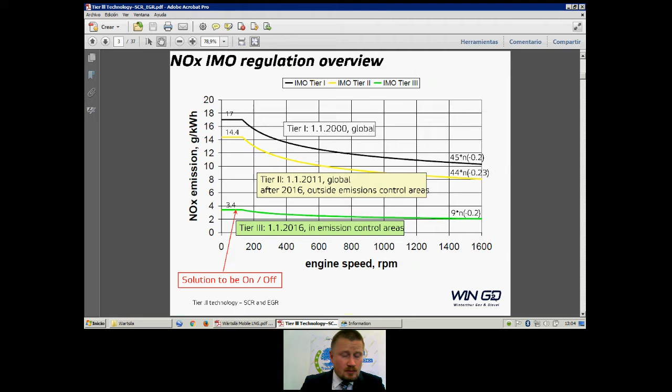So Tier 1, Tier 2, or Tier 3, it's based on a formula, and Tier 3 is a much lower, or much more stringent, requirement on the engine manufacturers. And you can see there is a drop from 14.4 to 3.4. So that's quite a drop.

If you look at SOx emissions, or sulfur oxides emissions, in European ports this is already implemented since roughly 2010. There is already a requirement worldwide. Then, sorry, that is coming 2020. It's 0.1% already in sulfur ECAs. Worldwide it is 3.5, and in 2020 that will become 0.5.

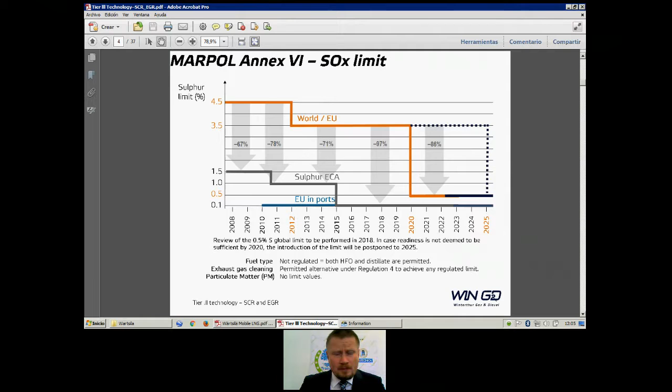What that means is that the US Coast Guard has implemented this emission control area completely for sulfur and for NOx. So any ship calling a US port on the East or West Coast has to comply with Tier 3 requirements. Now, this affects ships coming into service, not the existing ones. This entered into force sometime in 2013 in the United States.

When you look at the options available for complying with these requirements, there are not many. For NOx purposes, you either use an SCR or EGR, or you burn gas.

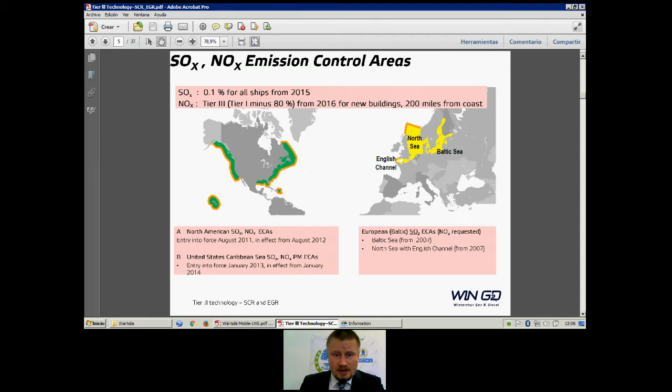Yeah, this is basically the slide. So if you look at ships to be compliant with both sulfur and NOx, let's say nitrogen oxides emissions. Let's say first option, if you do no change, then that's not necessarily an option because you will be quickly out of business. The regulations will not allow you to operate anymore, so you will be out.

Simple as that. You go to fuel switch, and fuel switch means that from your traditional heavy fuel oil, which is a residual fuel, which is a dirty fuel, which typically has high sulfur content, well, it all depends on the price you want to pay for the fuel. So typically fuels had high sulfur content. Now, fuel switch means that you switch to a fuel with less sulfur content. This means you will be compliant with sulfur emissions. That is, by definition, low sulfur fuels, low sulfur content, therefore compliant with sulfur emissions.

But then you need to be compliant with NOx emissions. I'm talking about either the future for, let's say, North Sea, Baltic Sea, when NOx is supposed to come into force sometime 2016, or if we look at the east and west coast of US, where you already have to be compliant.

Now, low pressure SCR or SCR and EGR, let me use only these two. That is selective catalytic reducer, that is SCR, and EGR is exhaust gas recirculation. These are two technologies that you can employ to clean your exhaust gases of NOx. So you use these two devices.

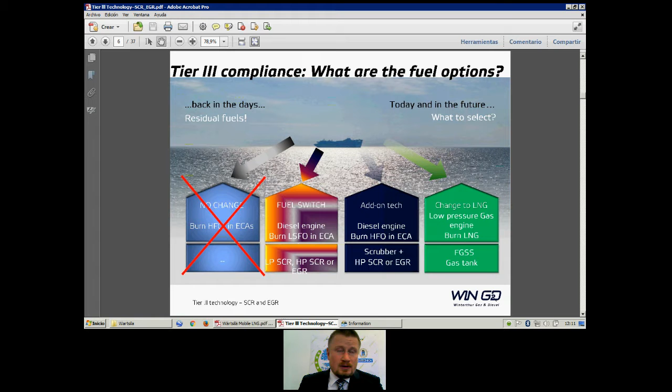Then the other more neat approach, which the two suppliers available, Wärtsilä and MAN D&T, primarily for two-stroke of course, offer is to change to LNG. Now what LNG provides you, I mentioned earlier that for EEDI calculations, methane, or natural gas, has a lower carbon factor in the formula. So by definition the fuel is more favorable. It's more clean. Particulate matter, which I haven't talked about yet, when you burn HFO there is a very high emission of that. When you burn gas, it's a much cleaner exhaust. And gas typically has virtually no sulfur in it. And if you use low pressure dual fuel engines, then you don't need to have an SCR and you will be compliant with tier 3.

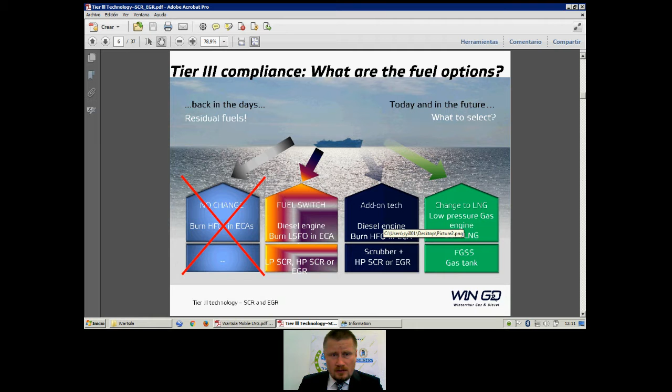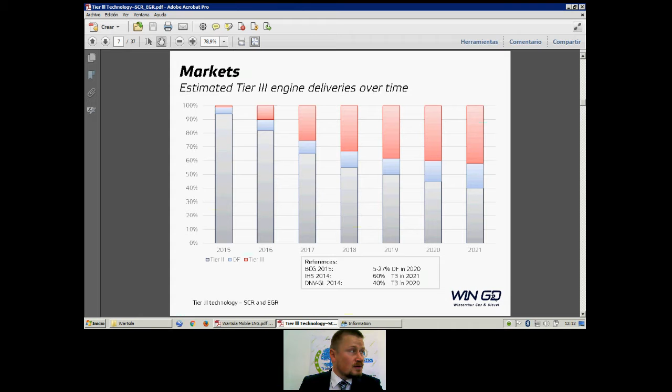I'm going to clarify what is high pressure SCR and what is low pressure SCR, but eventually they are all, say, the catalyst you have in your car for NOx. EGR is pretty much the same. It's exhaust gas recirculation, as the name implies. You get the exhaust gas, you get it washed, then dried, and then back into your cylinder. So this process requires some equipment, some fresh water for cleaning, and some blowers to dry the gas, because you don't want too much water in your cylinder. Then the SCR is a bit different from the EGR.

Now the principle of SCR, or selective catalytic reducer. It's based on urea injection. You have a mixing pipe. Because you have high pressure and high temperature in that mixing pipe coming from the exhaust gas, the urea splits into ammonia. Basically what you need is ammonia to get into your catalyst, which is the brick in simple terms. Then you have an exothermic chemical reaction, releasing heat as well, and during this process you get nitrogen and water.

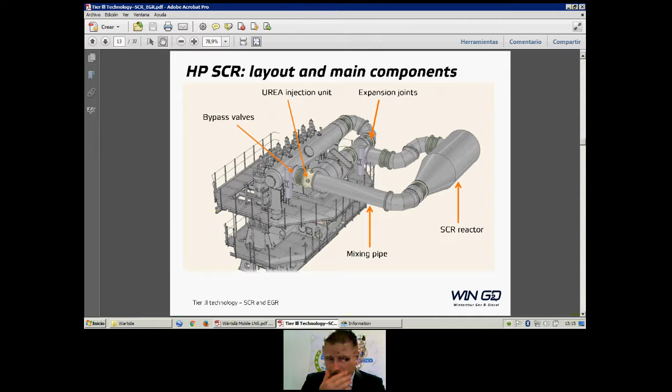I'm not talking about the SCR itself, but the entire system, because you have the mixing pipe, you see here, the elbows because you have very large diameters, the air receiver, all the system here. Very large piece of equipment. Whether low pressure or high pressure, SCRs both work on the same principle. The only difference is the location of the SCR itself.

Now, just a minute. Yes, here we are. Back to the main slide, let's say.

Now, the SCR is temperature dependent equipment. The high pressure SCR has to go before the turbocharger, and the low pressure SCR is typically positioned after the turbocharger. By that I mean the high pressure SCR needs to be installed very close to the engine, and the low pressure SCR can be installed in the funnel. I'm going to draw some parallels here, but they are not as black and white as I'll mention them. We can argue that the high pressure SCR could be more easily implemented on newbuildings, because then you design the ship and have more freedom to position this equipment around the engine.

And the low pressure SCR, we can argue, is more favorable for conversions, where typically you already have an engine room, a vessel in service, so you don't want to destroy what you have paid for, and then you would put it somewhere in the funnel. Not saying that doesn't disturb the exhaust pipes or that you don't have to rearrange, but at least there's much lower cost involved.

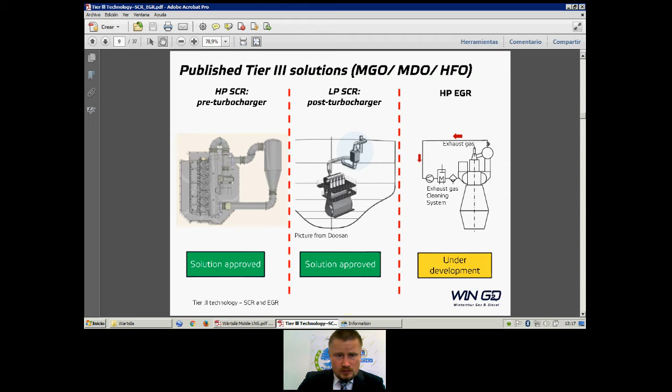EGR is a solution that is attached to the engine itself. All the piping and recirculating is very close to the engine, practically attached to it. Then you have the ancillary systems that have to stay in the vicinity of that engine as well. This is just a very schematic diagram of how the system looks. You have valves, blowers, scavenger, coolers, turbocharger and compressor.

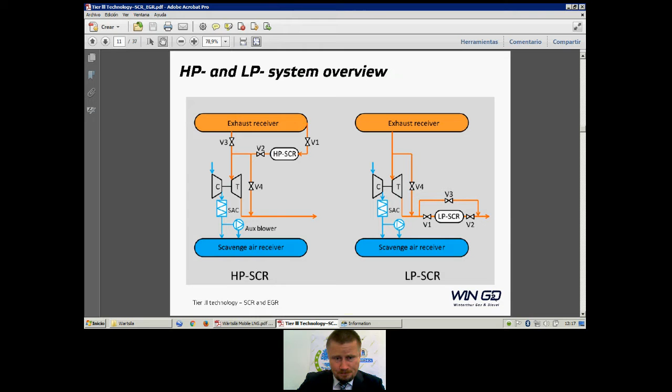Okay, let me go a little bit about this high pressure SCR. I'm going to jump on this slide here. Now, SCR is a very large piece of equipment. It's not cheap, let me use this word. It's quite expensive. And of course, if you are not running 100% in ECA, you don't necessarily want to run your SCR if you're not forced to. And I'm saying that because the more you run your SCR, the more you have to do maintenance on it, and the more it's going to cost you.

Now, I mentioned before that it's similar to cars, but imagine a much larger scale. So you have a number of valves that will bypass the SCR. If you're not in ECA, then from the air receiver, the exhaust air will go directly into the turbocharger. You see the red arrows here and the blue lines here; basically these are the bypasses. You have the gates that are closed.

Now, when your ship enters into ECA, you will need to run your SCR. You will close the blue line here. I don't know exactly if you see my pointer, but in the lower left picture you have the dark blue arrows and the light blue. The light blue is a valve which is closed, so from the air receiver the air doesn't go directly into the turbocharger, but goes into the mixing pipe and then into the SCR. At the end of the SCR, hopefully you get a NOx-free exhaust gas, and that goes into the turbocharger and continues the path into the funnel and out.

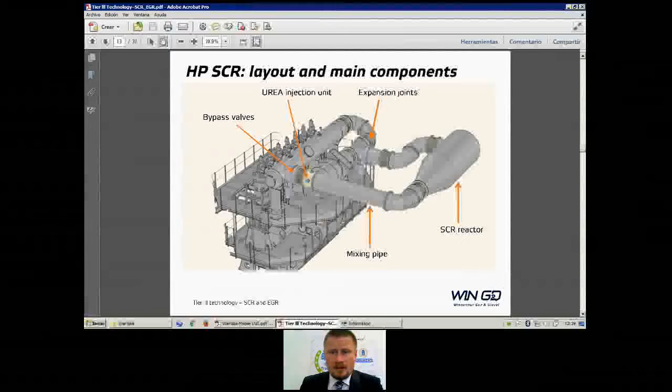Okay, you need to have a tank for urea. You need to have your pump for that, and then you need to have the compressed air to blow the bricks for cleaning.

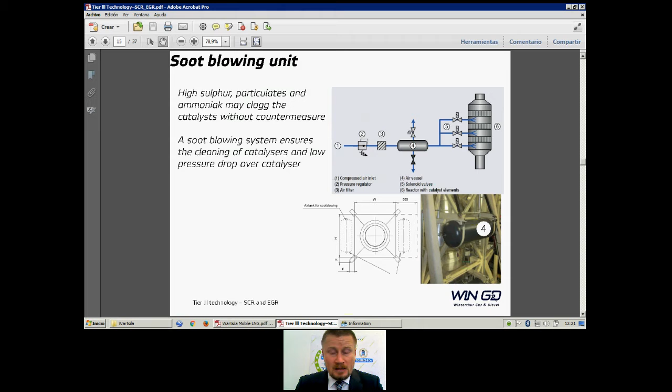All right. Looking at what we, Wärtsilä, Winterthur Gas & Diesel, have done in that respect: for high pressure SCR, we have a number of references running since 1999. Whether you are aware or not, there is a test engine, 6 RT-flex50, which is DF actually, or has been non-DF and then converted to DF. That also has an SCR. A number of other ships are running on high pressure SCRs.

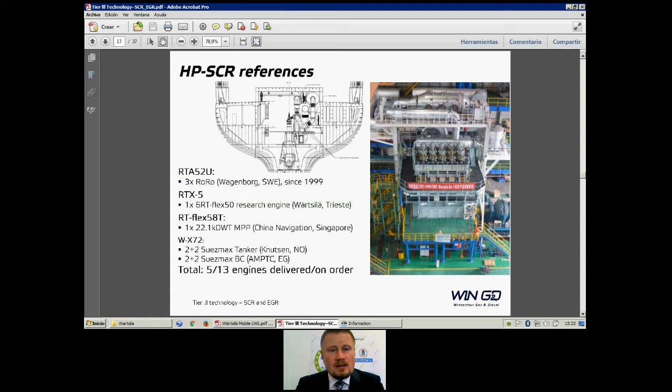To make it simple, high pressure SCR means before the turbocharger, that means close to the engine, or otherwise very close to the engine. Low pressure SCR means, imagine it somewhere in the funnel. So you get more room in your engine room. Right, low pressure SCR, I mentioned a little bit about this. In both cases, low pressure and high pressure SCR, there is no modification required on the engine side.

I feel that I need to tell a few more words about WinGD, Winterthur Gas and Diesel, what we do. We don't manufacture the engines. We actually design the engines, we own the IP, and then we sell these licenses to our licensees in China, Korea, Japan, even Europe, and Vietnam to build the engines. So we don't build the engines ourselves. We develop the concept, the design, the product itself, and then sub-suppliers are manufacturing this on our behalf.

Of course, together with them, we focus on getting the quality and getting the product compliant as required. Now, when it comes to SCR, this is cleaning the NOx from the exhaust. This is something that we need to do because it's a requirement from IMO and it's dependent on the technology itself. As I said, the sulfur is dependent on the fuel, and CO2 is rather dependent on the ship design, ship type, and the willingness of a particular ship owner to run at 40 knots or 18 knots, which makes a big difference. So SCR is more tied to the technology.

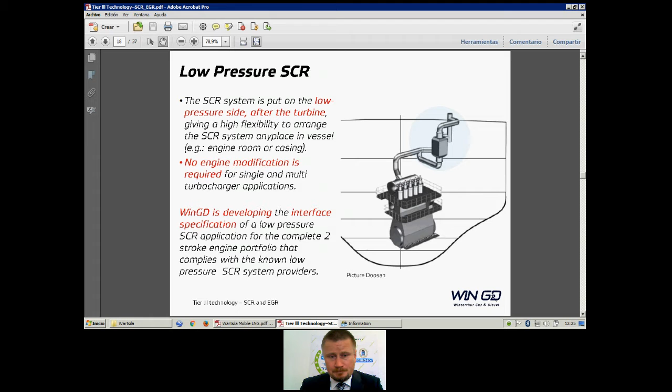Let's look a little bit at the components you will have here. If we start with the low pressure SCR, you have the diagram on the upper right hand. The design of this system is owned by Doosan. Doosan is a manufacturer in South Korea. Typically, you have the reactor, which is the catalyst itself, the big blue piece on the funnel, on the exhaust pipe you see. You have the ammonia generator, a burner, a blower, main valves, and the ammonia injection grid. It works in a similar way like I showed before. I'm not going to explain this further.

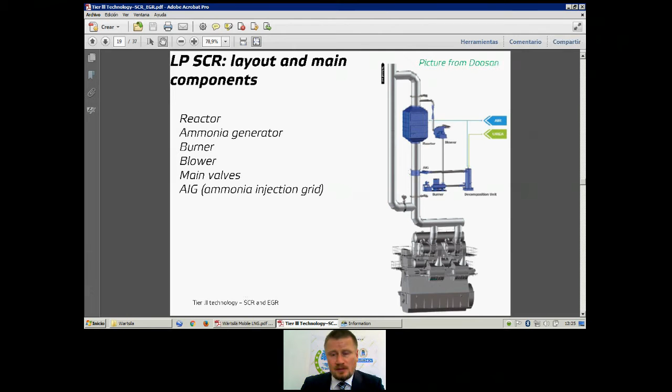Difference between low pressure and high pressure with regard to equipment. The high pressure has the downside that it needs to be near the engine because of the exhaust temperatures, and the low pressure needs some extra components because it's higher up the exhaust chain. Your target temperature is somewhat lower, but you need some extra equipment. If we compare the equipment you need for one or the other system, they're all listed here, but primarily you will have this blower and some extra fuel oil supply for the burner. So basically you will have to tune your two-stroke engine to burn a bit more fuel to get to the right temperature level at the inlet of the low pressure SCR.

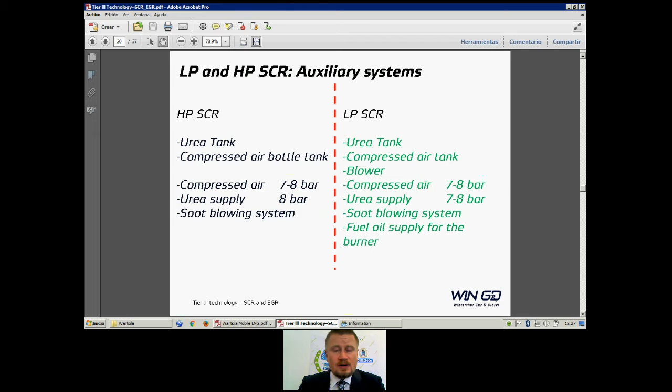This means basically that your high pressure SCR has a lesser impact on the specific fuel consumption of a two-stroke, while the low pressure SCR has a somewhat higher impact on the specific fuel consumption. It starts somewhere from 80% MCR and below in case of low pressure SCR, and in case of high pressure SCR, 40% MCR and lower. So you will see a gap in that region, 1 to 3 grams more consumption for high pressure SCR below 40%, and 1 to 3 grams from 80% and below in case of low pressure SCR.

Size-wise, this is for a 15 megawatt two-stroke diesel engine. The size of such a unit would be something like 4.3 meters, diameter 2.6, and if you look at the other reactor, the low pressure SCR, you have the dimensions listed on the right side. So the low pressure SCR is somewhat smaller than the high pressure SCR. In the end, they both do the same.

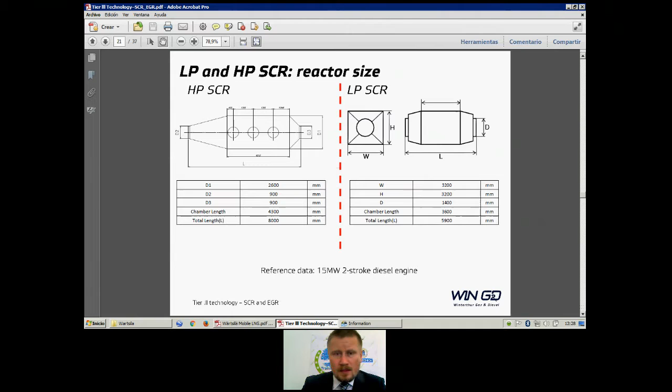I was mentioning about the temperature and the impact of specific fuel consumption, somewhere below 40, 50. The target temperature for high pressure SCR is about 310 degrees Celsius. In that range, you will have a gap because you need to tune your engine to burn a bit more to get to the right temperature. That means compared with an engine that doesn't have an SCR, the engine with high pressure SCR attached will see an increase in specific fuel consumption.

This is basis low sulfur fuel with 0.1% and below. Now, if you look at the low pressure SCR, the temperature variation is a bit different, but the target temperature is also different. Nonetheless, at about 80, 90 or so, you need to tune your engine to burn a bit more, again, to get to the right temperature at the inlet. Otherwise you'll not get the desired effect, and the catalyzer will not actually perform.

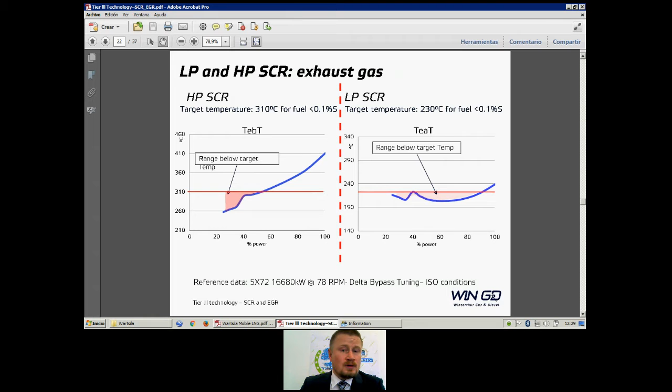Similar way here, the tunings. Basically what I mentioned, that you have this penalty of 1 to 3.

Here you can see a specific fuel consumption curve for a diesel engine, like a tier 2 engine. The green line on the left chart means it's a tier 2 engine, more specifically a 6X52, 8 megawatts, roughly 9 megawatts. When you have the SCR attached, you see a slightly higher specific fuel consumption from about 40 and below. On the low pressure SCR, because of the temperature variation we saw in the previous slide, the green line is the tier 2 solution, and there you see the engine performance in terms of consumption compared to a tier 3 engine with the red line, which has a higher consumption.

This is basically the effect of SCR. Because fuel is a very important cost item in ship operation, typically a ship owner would not like to have an engine that consumes more. On the other hand, he might be constrained by aspects like space in the engine room, like new building or conversion. So you have options at hand, but they all cost money. There is nothing for free, at least not yet. So it is going to be a higher consumption.

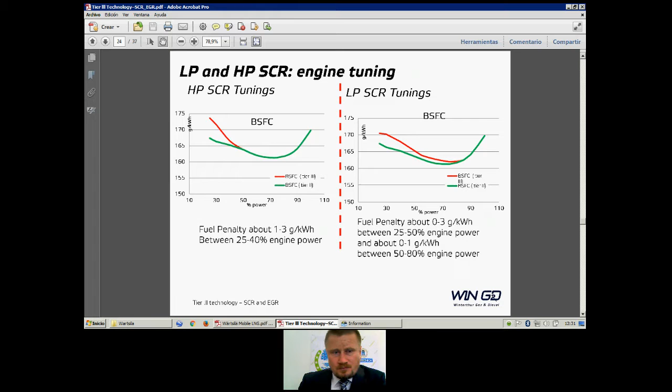This is basically very similar to the one before, just that it's a different tuning for the engine and how that affects the consumption.

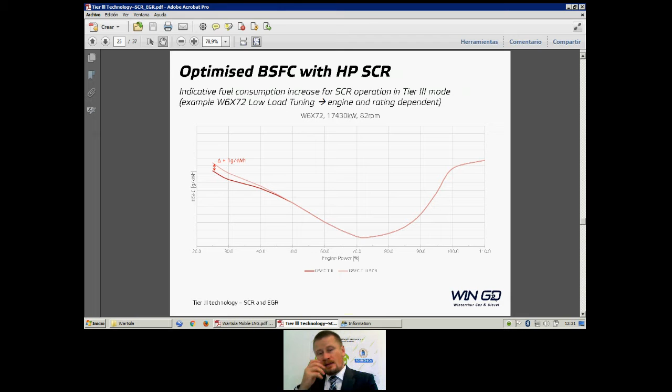The available tunings for the engines include standard tuning, delta bypass, and low load tuning, both for high pressure and low pressure. You see that you have the bypass, delta bypass, and low load, where you can actually have the tier 3 solution, high pressure or low pressure, installed. I think I'm going to talk a little bit about this tuning, what they mean.

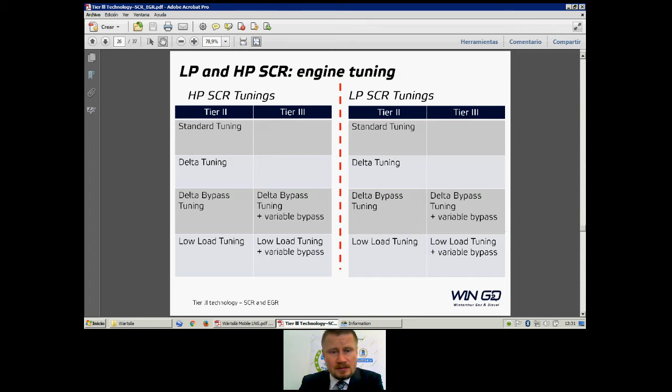The SCR can be applicable also to multiple turbocharger solutions, so it's not only applicable to a single turbocharger solution. All this requires very close communication between the engine designer, like Winterthur Gas and Diesel manufacturer, like our licensees, the SCR component supplier, which can be the licensee itself, the same manufacturer for the engine, or can be a third-party sub-supplier for the SCR solution, and of course the shipyard, because they have to build, install and commission the whole system in the end.

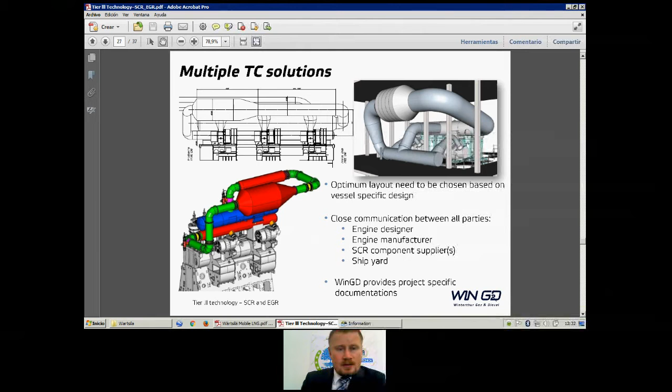Let me talk about EGR now.

Just to make a parallel here, Wärtsilä, or Winterthur Gas and Diesel nowadays, we have been developing in the last year the SCR solution for tier 3, while our competitor, MDT, the main competitor, has developed exhaust gas recirculation. They both serve the same purpose, cleaning the exhaust gases of the NOx oxides. One works better than the other, or otherwise, depending on the application. You have seen in case of high pressure and low pressure EGR, SCR, what that means: one is before the turbocharger, meaning it's more crowded in the engine room afterwards, and the other one is after the turbocharger. Now the EGR system has its advantages.

We will see them in a second. One of the main advantages is that you don't need to have urea. You use just fresh water to clean the exhaust gases. But then you need a water treatment that you give to the exhaust, and then you dry it, and then you bring it back to the cylinder.

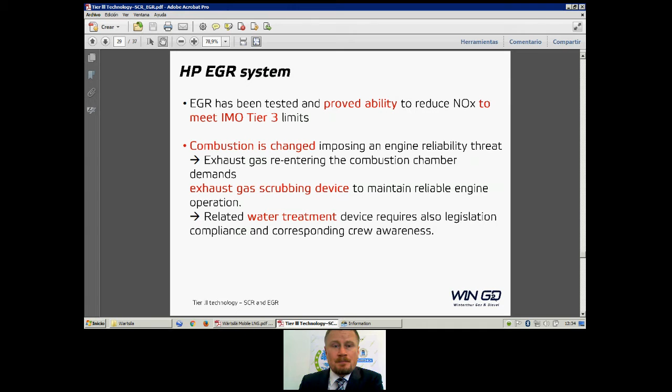Just to compare a little bit the SCR versus EGR installation, the EGR is a solution that needs to be attached to the engine, in a way that you have very short pipe connections, because you have to recirculate all this, and you want to minimize the losses in the system.

On the left hand side, low pressure and high pressure SCR, we put them under the same title because it's the same principle. It differs in location. High pressure EGR on the right side requires a bit more equipment, but on the other hand, it doesn't require urea, which might be an advantage. It depends on the operation profile, the preference of the ship owner, and many other factors.

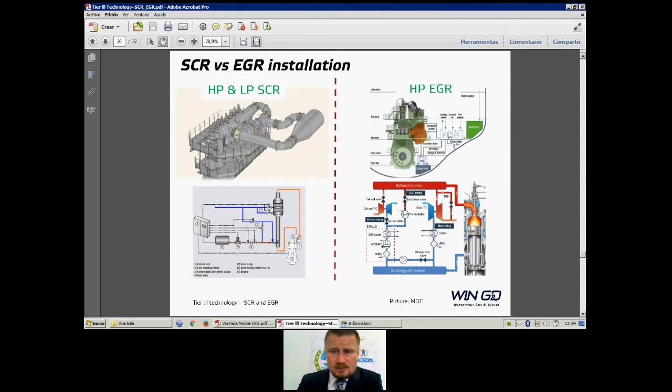This is how it typically looks like for high pressure SCR, or you have a slide between high pressure and low pressure. Comparing high pressure SCR, the reason Winterthur Gas and Diesel favor the high pressure SCR more is because the impact on specific fuel consumption is far less than the low pressure SCR. Of course, there are situations where we have to go to low pressure SCR, either because of the design of the ship or because of the technology itself.

On the left hand side, high pressure SCR, the equipment you need and the requirements for urea supply at 8 bars, compressor at 7-8. Then you have NaOH on the right side, NaOH tank, freshwater, sludge, and some extra power to run those devices in both cases.

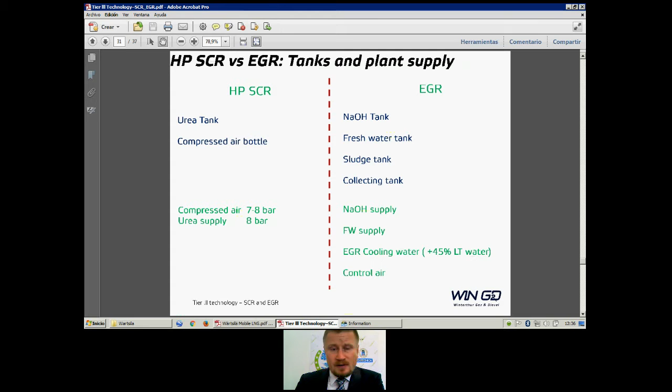Actually, a bit more on the EGR side. Both SCR and EGR are technologies developed by the engine manufacturers. Winterthur Gas and Diesel, like the company I'm coming from, are also developing EGR. This is something that will come in the next 1-2 years. The technology itself is developed because there seems to be a potential market for it, but nonetheless, so far, we believe that SCR is the easier way to go.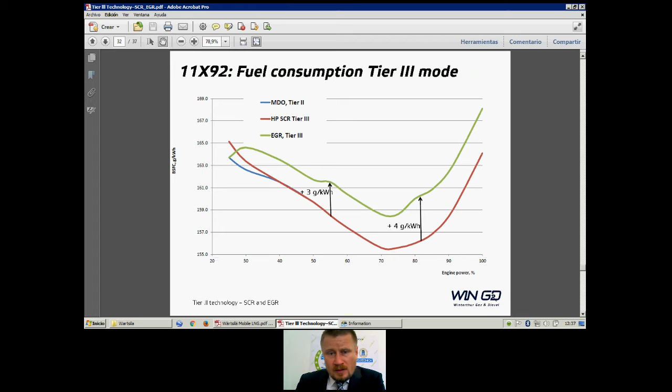So the higher gap is towards the higher engine operating range, up to 4 grams, as it is said here, all internal testing.

From the operational point of view, operational expenditure, we can see here an estimation of costs in percentage from the operational expenditure for high pressure EGR and high pressure SCR. If we say 100% is the total operational expenditure, let's say the orange stripe comprises of sludge, power, blower, the power for water treatment system plus the blower, and fuel penalty, as we have seen in the previous slide.

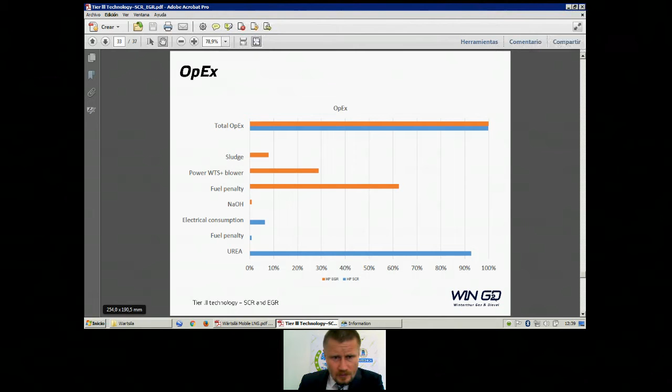Then we have NaOH. Then if you look at the high pressure SCR, yes you have the urea, yes you have a fuel penalty, and we can see it again here. You see the difference between the blue line and the red line, so it's far less. And electrical consumption, of course, because we have some pumps to run the urea. And in the end, well, at least it's not the end, I have a few slides more.

But typically the high pressure SCR is a lower investment than a high pressure EGR. If we combine the two, you would see that the high pressure SCR is somewhat the preferred solution from the cost point of view, including the consumption. As said before, SCR is the first choice for IMO Tier 3 compliant diesel engines. It provides lowest investment costs, it's a proven solution, at least coming from 20 years experience in power plants, and it is applicable to the entire engine portfolio.

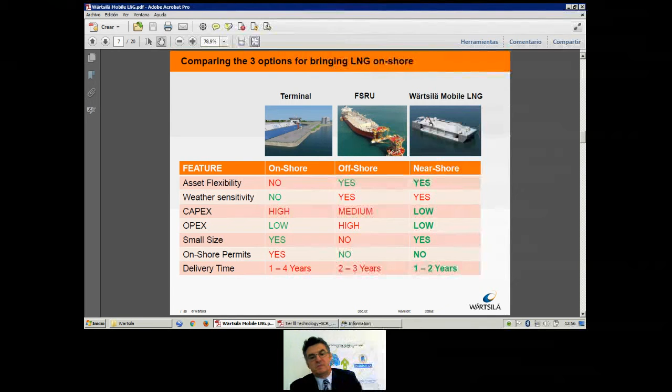And the delivery time. Building a small terminal, the construction itself doesn't take that long, but from the moment you start asking for the permits, etc., it can take between 1 and up to even 4 years to get the installation up and running. FSRU can take between 2 and 3 years, depending on the shipyard, schedules of the shipyard, workload, etc. And the mobile installation you can have almost soon. So it's a matter of making the decision, and in a couple of years maximum, you already have the installation running.

And so this is an image of what we think could be matching future demand of LNG in places where LNG today is not available, and they don't want to refuse to have cheap and clean energy involved. So this kind of installation, and I think we are the first providing this kind of solution to the market, can handle small amounts of LNG efficiently, which is important. Efficient matches with investment costs, and small amounts, which can be what a small island needs.

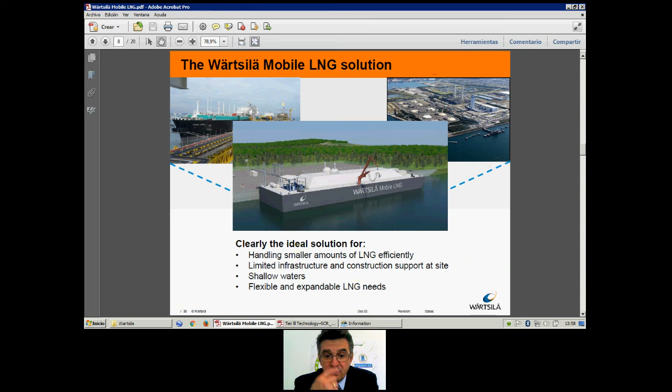The infrastructure you need onshore is not that important at all. You can build it very easily, and you can transport it to places where you don't even need to do a lot of dredging prior to having the installation, which is again costly. So this is flexible and expandable, which means you can make it as big or as large as you want, not taking stupid decisions.

This picture, sorry for it, it's not that clear, it's a PDF. But you can find 2 lines of numbers in the lower half of the slide. The first one you should look at is the megawatt figures. These are typically power plants that can be installed anywhere. You can have power plants going from 50 megawatts up to 800, and of course bigger. And depending on the demand, of course, you can have a small one. We're talking, of course, about power plants running on LNG. They are typically refilled twice a month.

So, the needs of LNG, for instance, for a 50 megawatt power plant with an average efficiency of 46%, and these are the typical values of calorific value and density of typical LNG. If you want to refill it twice a month, you need a tank of 7,500 cubic meters, and so on. So double for 100, etc.

So for the smallest in this chart again, power plant, 50 megawatts, we can provide an LNG barge, the basic one, as we call it, which has almost nothing on board apart from the tanks and the regas unit, which is enough. From as low as 5,000 cubic meters up to more than 10 and up to even 15. And of course, if in the future you need more energy, you can add more barges up to, why not, 30,000 cubic meters.

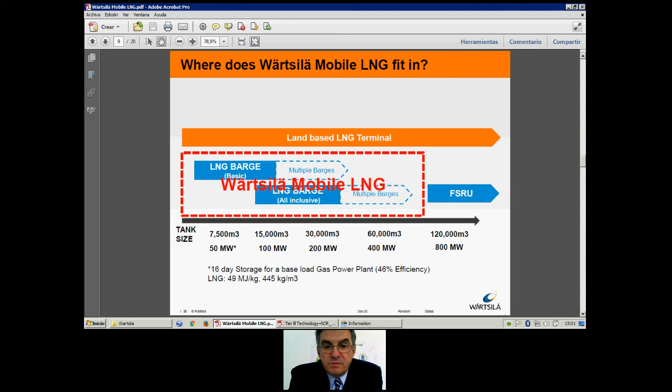So this is it. Just to give you a hint of how it would look like, this would be the smallest LNG storage and regasification barge that can be provided to a community that is demanding it. The storage volume can go from as low as 5,000 cubic meters to 15. This is a bilobular C-type tank. Bilobular, you can see one cylinder there, but they are, let's say, two attached to each other.

It's bilobular. The width of the barge should be no more than 32 meters, which curiously matches the Panama Canal, the existing one. And the length should go, depending on the amount of cubic meters you want to store there, between 80 and 150 meters. The important point, draft, maximum should be 6 meters, which is almost nothing. You can easily find 6 meter draft waters almost everywhere. So that's an important point.

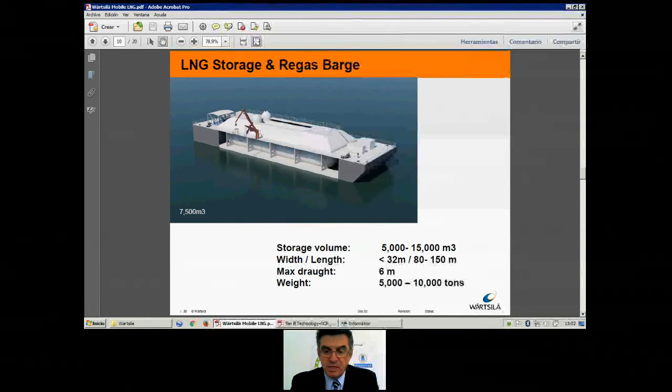And this is what we call the all-inclusive, which will be in places where they want the barge to be self-supporting for everything. So it should also have its own control room and also the power source, a 1 megawatt genset there, for being absolutely self-sufficient. And this one should go between 10,000 up to, why not, almost 40,000 cubic meters.

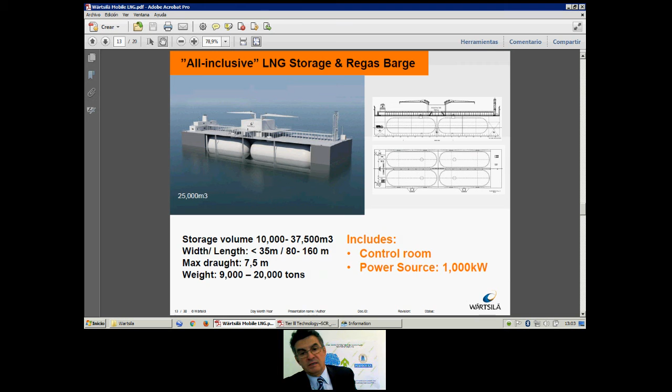And you can see the length is the same, and then the width is going up, and especially the draft is quite big. So that makes it go up to 37.5 thousand cubic meters. And the weight again can go up to 20,000. This is the solution. Again, what makes sense in all this is to have the possibility of having cheap and clean energy in places where today, and this is a fact, they always have to go to dirty heavy fuel oil.

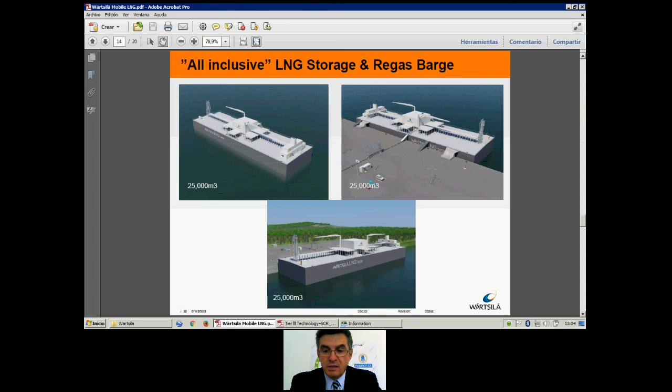And of course, the solution can be even more complex or more complete, so to say, because it can be combined with a floating power barge. In this picture, you can see the complete solution. In a community that needs clean power supply, the decision can be made today, and in less than 2 years, you have the installation up and running where it's needed with a clean and cheap solution.

Yeah, the mobility: you can take them where it's needed, and when it's not there, you can take it to another place where the need is more, or simply the place where the barge is located, the community or the country wants to transform it into a different thing, and then they think that the best location for the new power plant is another place. You can take it and move it so that you can free the space for other issues.

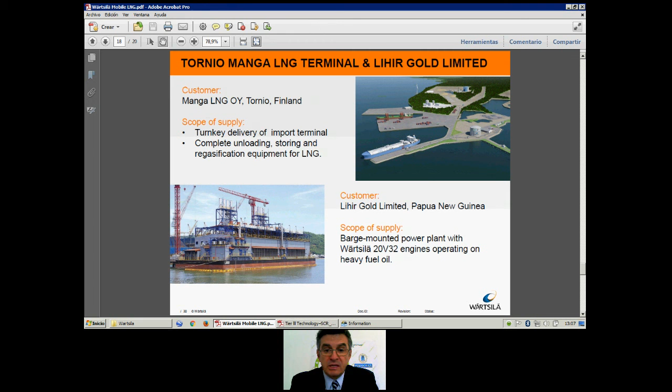With this, what we say is that we are not promoting specifically the LNG barge. What we say is that the community has to have in hand all the solutions for all the types of needs. Obviously, it's the onshore terminal that we are delivering in Finland, in Tornio. And of course, again, we are also delivering regas installations for FSRUs and for important and different owners and shippers all around the world, Hyundai Heavy Industries in South Korea, Petronas in Malaysia, and some others that are already running. So this is what we have.

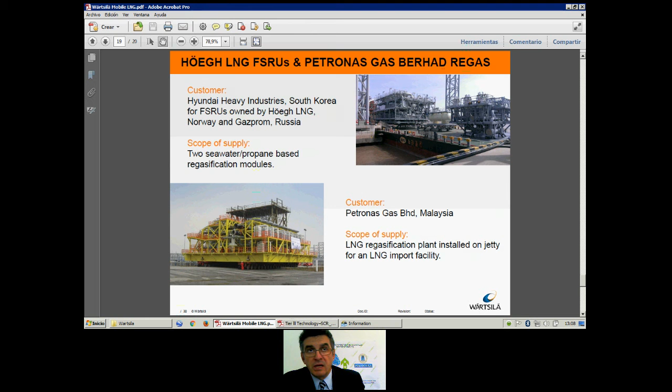So again, as a summary, clean power investment analysis. Clean power: why should a small community not be able to have clean power? Why do they have to have, as they have today, only heavy fuel oil power plants? They can have power plants running on LNG, but how can we deliver? How can the LNG be delivered fast and cheap without making huge investments?

Because it's not only the community, but also the utility companies. They are still reluctant to make investments that in the future are not giving a return on investment that is reasonable. So with this kind of solution, the floating barges, we can say to the world and the communities, to the islands specifically, that there is no way that they have to refuse to have clean power at a reasonable cost.